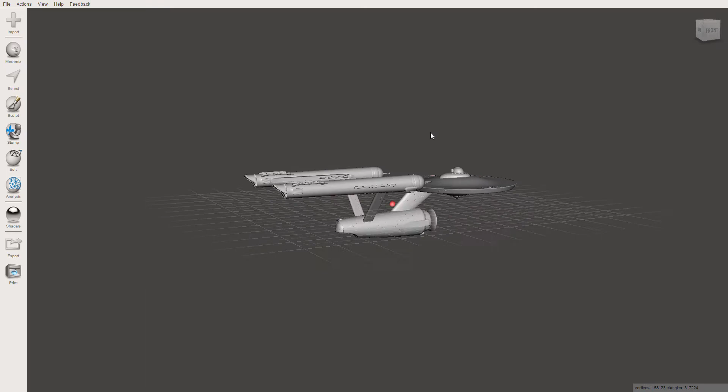If you want to pan around, you hold down the right hand mouse button like that. The left hand mouse button, as you can see here, I'm clicking away, it does nothing. You can pan like that.

Now if you want to move it up and down like that, you go back to that wheel, and rather than moving the wheel back and forth, you just click the wheel down, and you can move up, down, around like that. You're going to need to be able to do that down the line. So let's go ahead and get started with this model here.

You'll notice that it's half above and half below the plane of reference here. That's perfectly normal, most people keep it like that, but I like the whole thing being above the plane of reference. That's just me. There's a couple different ways to do that.

The first and most obvious way is to come over to, wait a minute, where am I at? Yeah, edit, transform. And then you can grab here and move it up or down, inside, front, back like that. Now that's a simple way of doing it, but there's an easier way.

When you've got it sitting here like this, you just use hotkeys and hit T for transform. You can put it up above the field like that, and then click accept. Now the next thing we want to do is scale this. Before we've changed anything on the model, we want to scale the whole thing to whatever scale we like.

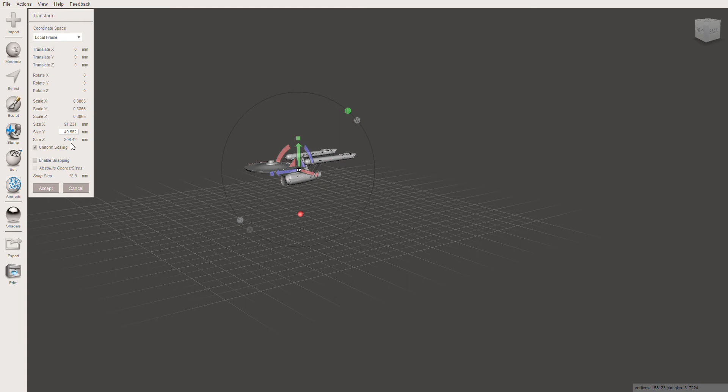206.42 millimeters. And then once I click out of that into another field, because you can see I've got my uniform scaling here, everything matches up, and now I have my smaller model. So let's go ahead and accept that right now.

And let's play with that transform tool for a few more minutes here, just so that you can see some other things that you can do with it. If I use my hotkey T to go to transform, you saw a couple other features besides the X, Y, and Z axis that you can move it on here. You see these little squares. Well, if you click on that and pull it, you see what it's doing to the whole model, which is just beautiful. And you can turn your model into some crazy freak of nature, as you can see right here. He's definitely gone through some sort of warp bubble there.

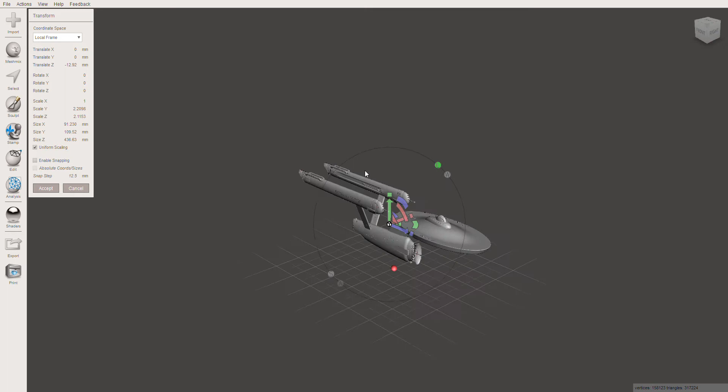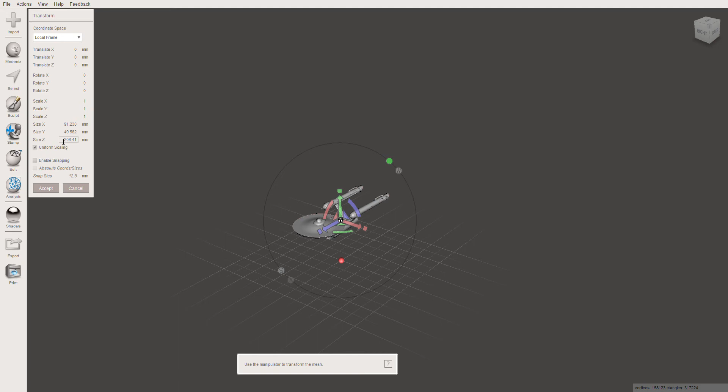And you can also rotate your model. If you grab these arcs, you can rotate your model in any direction that you want. And you're going to use those features later on, but not for this particular tutorial. Obviously, we're going to cancel all of that, and we're just going to make sure that we kept ours at 206.41 millimeters. Okay, so that's all fine.

Alright, so now you have an idea of how to move around in the space, and I'm going to show you how to cut the model up. Now, for anybody who has 1/400 scale models, we all know and love the StarCraft's original series Enterprise and how that's basically cut up. So since we don't have a pilot episode Enterprise from StarCraft's, we're just going to cut this one up as though it was a StarCraft's model. Which means I'm going to cut it up with the saucer and the interconnecting dorsal as one piece, the secondary hull on its own piece. Obviously, the deflector is going to be by itself, and then each nacelle and pylon is going to be its own individual piece.

So the very first thing we're going to do before we touch anything else is we're going to come over here to Edit, and we're going to make sure that this is one single model and not a few small pieces that are stuck together. So we're going to come to Edit, and we're going to click Separate Shells. Okay, and we'll see that there's actually two shells. There's two pieces of this model that are currently in here right now. And we're going to just make them both disappear, because a lot of times one shell will be just this tiny little thing that you can't even realize.

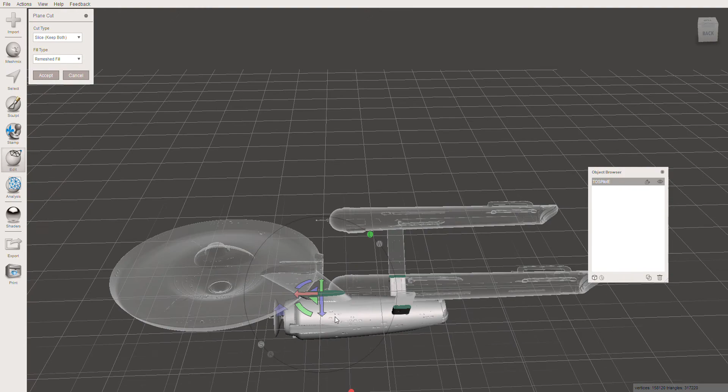But for now, since it's easier to see that from above rather than below, because I want to see exactly when it touches the secondary hull, I'm going to use this big arrow that you see right here, and just click on it once. And you see now I can see everything underneath the plane of slicing, but not above. So I'm going to continue, and again, use the center key here, move this over, and then use the right-hand key so that I can pan it around, scroll in, and I'm going to come down here like so.

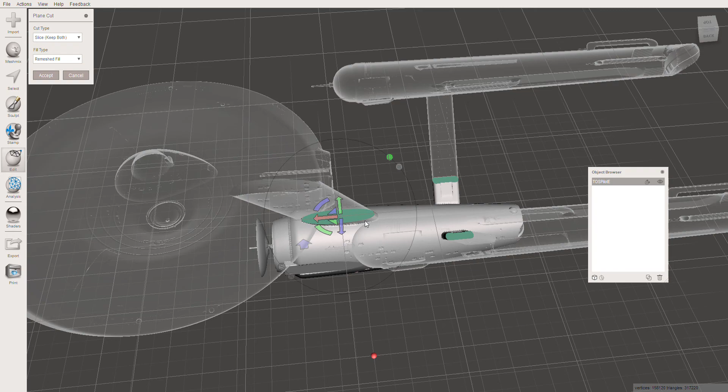Now see, I've hit the top of the secondary hull here, but there's plenty of room there to work from. So I'm going to come over here to the middle. You see how there's still more of the neck down here because of course it's angled. So I'm going to angle my plane of cut so that it matches roughly the angle of the root. And then I'm going to continue going down. You're not going to be able to get this 100% perfect, but you can get it pretty close. It's actually pretty cool how close you can get just by using the Mark 1 eyeball.

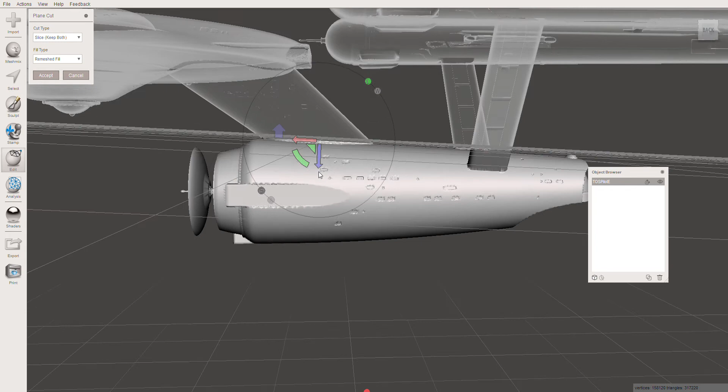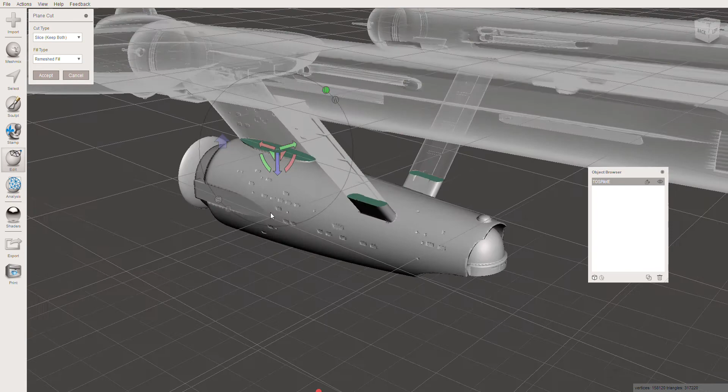And I'm going to come down a little bit more. Now see, you can see on the green, now I'm starting to catch this side, but I'm not catching that side. So that means I'm probably about as close as I'm going to get. So I'm going to grab this again, come up just a tiny bit. There. Yeah. And as I pan around, you can see that that looks pretty good. Now, since I didn't move any of the other axes, this is going to be exactly parallel. So we should be in good shape here.

And you'll also notice that I've also cut most of the pylons off here and here, but there's still a pretty big, hefty chunk of pylon on those sides. We're going to fix that. Don't you worry about it right now. Right now, we're just focusing on cutting the saucer and the neck away from the secondary hull.

You come back over to plane cut here. You make sure that you keep it at slice. You hit accept. And then from here, you need to select separate shells. Until you do that, you haven't actually officially cut the model apart. Now that I've hit separate shells, you see I've created a whole bunch of new shells. You can see them along here. And what it's done is it's separated the saucer and neck from the secondary, and it's also separated each one of these pylons.

So since we've done that, let's go ahead and take a second to name them first real quick. Instead of shell 1, shell 2, shell 3, we're just going to go ahead and double click and rename that saucer. This one we're going to rename secondary. We'll select that one and we'll rename it port nacelle. And last but not least, we'll take the right hand one and rename that starboard nacelle.

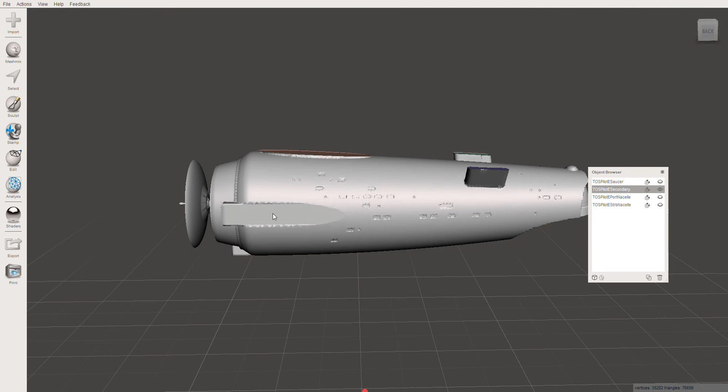You'll see that if I've got the item selected like this, but I've closed the eyeball, then that piece that just got turned off shows up as transparent red. But the minute I select another part of the model, boom, it disappears. Okay, so we've got that removed. Let's go ahead and turn off these for the moment as well. And let's work on finishing up this lovely secondary hull here.

Let's separate this deflector dish from the rest of this part here. And you know, the deflector goes pretty far down inside here, so we're going to have to cut that deep inside and then recombine all of these pieces here. And the other thing we're going to have to do is we have to remove these little stumps of the pylons here and here. So let's actually do that first. So we have our secondary hull selected. We're going to come back over here to edit. We're going to go to plane cut.

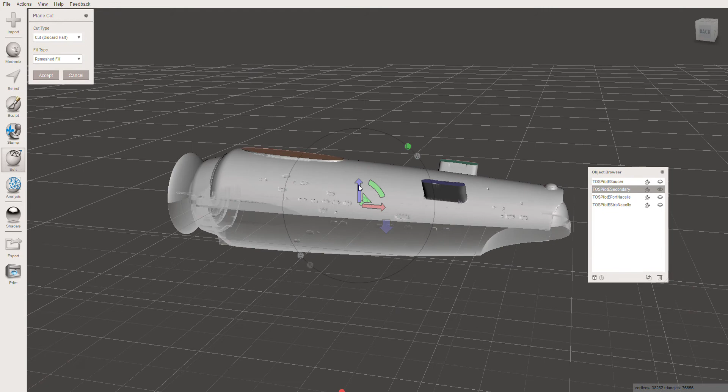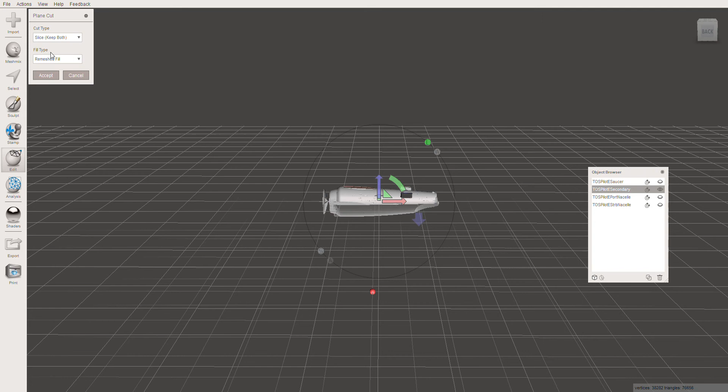And the plane cut tool is always going to put the center of the tool in the middle of whatever item you've selected. So you can see here that it's dead center of the secondary hull, which is kind of cool. That helps a lot if you're doing other items that you want to slice right in half. It automatically does that for you, which is very, very cool. But we're not going to do that at this point. First thing we're going to do before we start touching this is we make sure that we have this set. Instead of discard half, we want to keep it on slice, keep both, and remeshed fill.

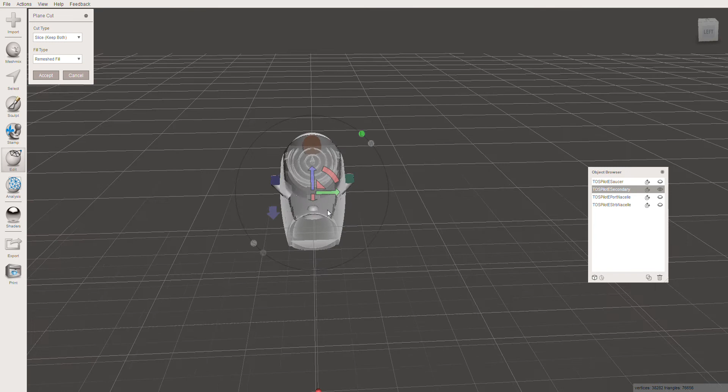And now we're going to go ahead and move the tool a little closer to the center of the parts that we want to remove. So we're going to pop it up here. And again, I want to be able to see from the top down, so I'm going to click this arrow. There we go, like that. Okay. Actually, I think it maybe looks better that way for now. Let's start with the starboard side one. We'll come over here, and you see how I'm kind of putting it in the center of the pylon itself. There we go. Now, obviously, we need to angle this appropriately compared to the model.

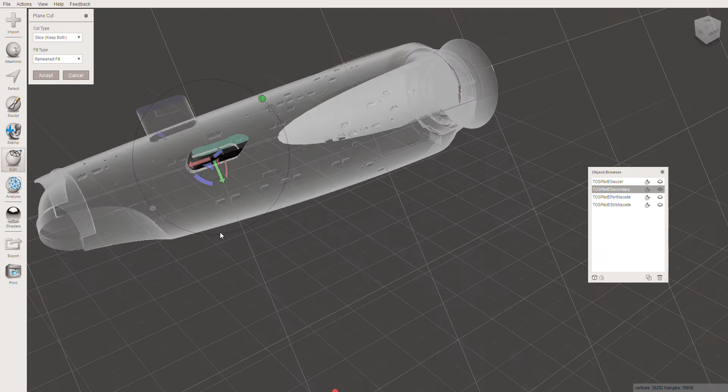We're getting close. You can see that we're getting pretty close here. And let's come down. Now you see this big green swath as well, besides the part that we're cutting. When we do this plane cut, it is going to remove this big chunk right here, but since we're keeping both, we'll be able to recombine that without any issues.

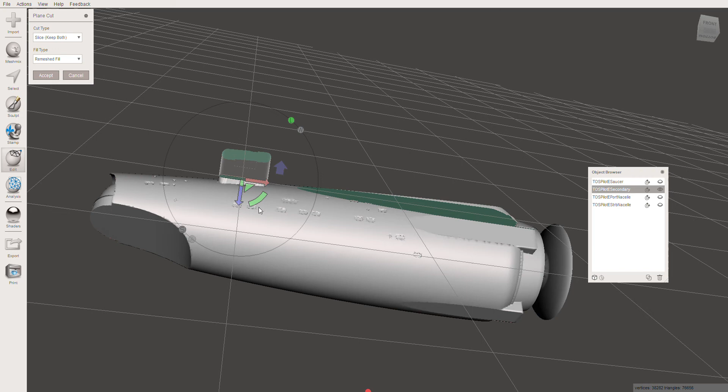Now again, because of the angles of the ship, you see how the slice is much closer to the secondary hull here at the front than it is the back. So we can fix that just by angling it along like that. And you see that it also removed all that big green swath right there. And we can continue scooching it down.

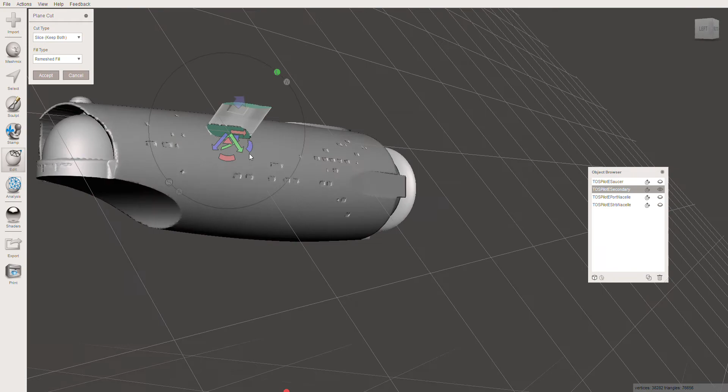We're going to try and get it as close to the hull as possible, just like we had done with the primary hull. That's pretty close. That's really close. Okay. I think we're good there. I'm just going to spin it around a little bit to make sure that it looks all right. Okay. Yeah, that definitely looks good.

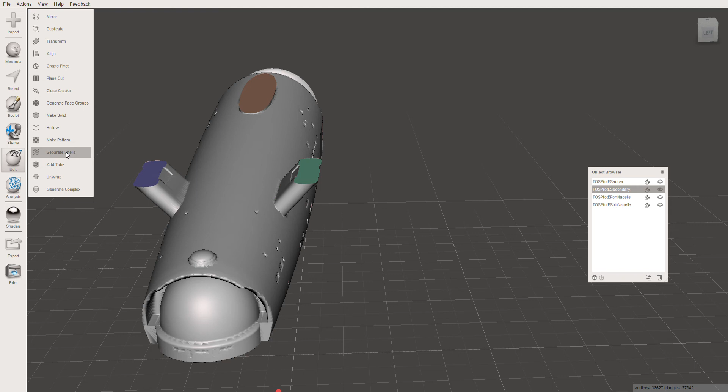So we make sure that we've sliced, get both. We hit accept. And once again, we hit separate shells. Now that's going to create that as a separate piece. And see how it's labeled secondary shell 1.

Well, let's go ahead while we're doing that, and let's open up the starboard nacelle, and we're going to combine these two. Select the main piece that you want, and then select the smaller piece by holding down the shift key. Let me show you that again. You select the main piece that you want, hold down your shift key, select the other piece that you want to combine, and you have a few different options to do.

In this case, it's always easier. You can do Boolean union. There's nothing wrong with that. There's a lot of good things about Boolean union, but in this particular case, when you're recombining these items, it's just easier for the processor, easier in terms of speed to hit combine.

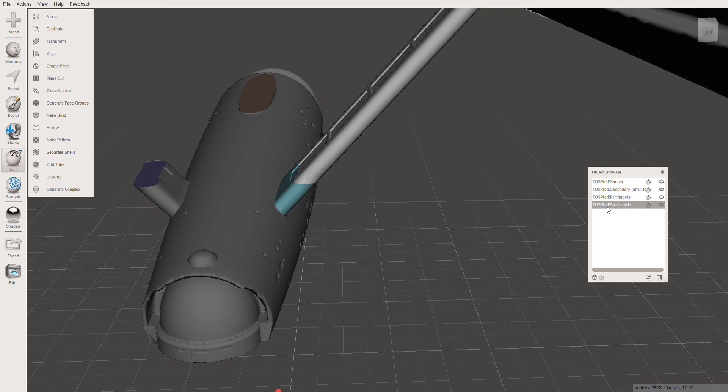And you'll see down here that because you selected the larger part with that name, it combined it in with that name. So now the starboard nacelle is all one full piece, and you can see the color difference from where we combined these two. You'll see that in the future parts as well. We can close that out. Now we're going to select the secondary hull again, and let's go ahead and do another plane cut.

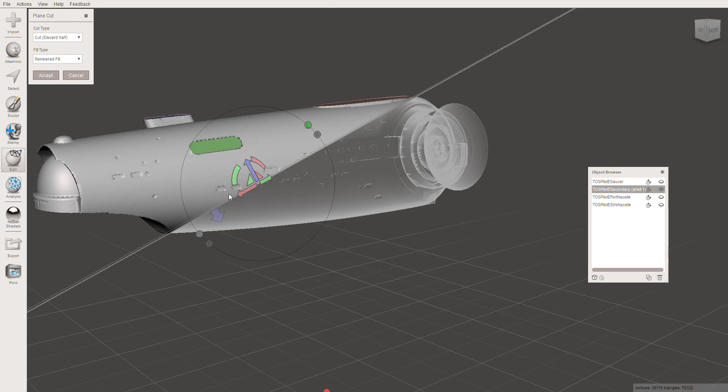Oop, there's a good accident that can happen. Sometimes you think that you're grabbing your tool, but you actually aren't, and you're just making a line like this. Now, what you're doing when you do that is you're creating an angle that the plane will cut along. You see how that worked? But that's not what you really wanted to do. So Control Z will fix that error, you don't even have to hit cancel, anything like that. Control Z will send you back to where you were. So we're going to try that again.

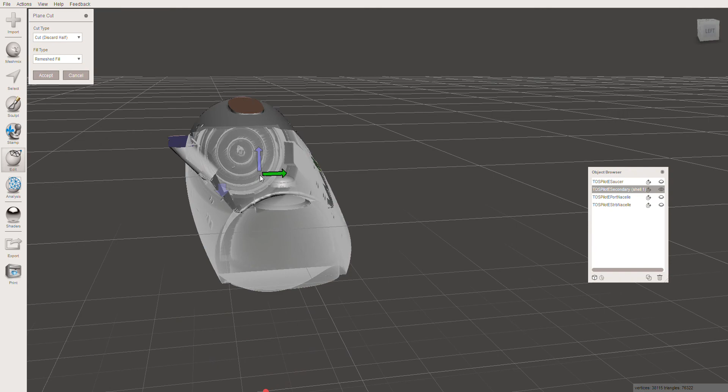We're going to take this, bring it over here, come around to this side, bring it up, bring it over, and we're gonna, are we in the middle? We're mostly in the middle. Okay. I've just found that it's easier to work from bringing the tool to the middle of the part that you want to work on. Okay.

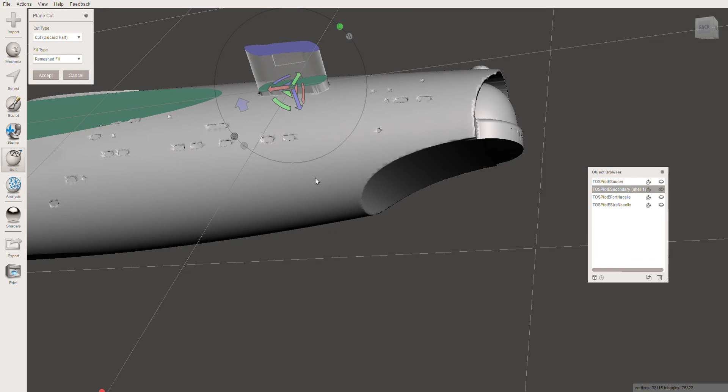And just like with the starboard side nacelle, you can see that even though we haven't moved any of these angles, because of the shape of the hull, the cut is much closer to the front of the pylon than the back. So again, we're going to take this and just rotate it like so. Now there's a couple different ways that you can rotate this, and I'll show you both right here.

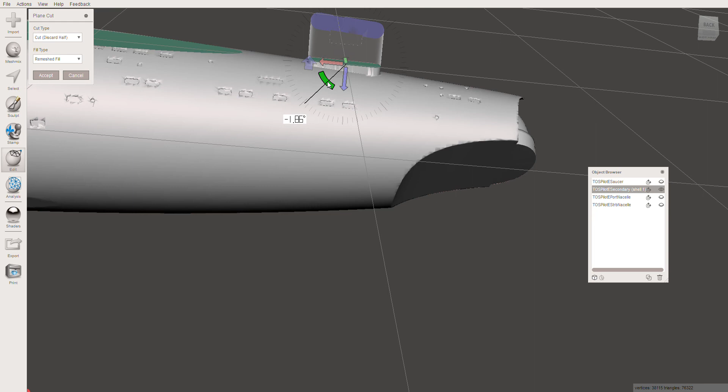If you want to do non-incremental bits, you see how it's giving you like 11.58, 9.45, 2.47, non-incremental bits. So you're just eyeballing. You can keep it inside of that dial face that you see. This dial face. Now if you come over to the dial face, 5, 10, 15, 20. You see how it snaps to those perfectly.

As long as you're touching the dial face, it will snap to those degrees perfectly. But if you're outside of the dial face, it will do non-incremental bits that will allow you to just eyeball it. And for models like this, honestly, most of the time I'm just eyeballing them.

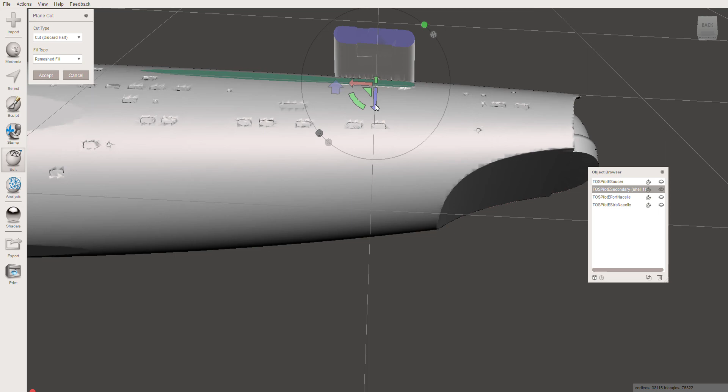Okay, let's get down closer, closer, not that close. And you can see why I said not that close. I'm in the green, and then all of a sudden, boom, now I'm slicing a piece off all along here, which I don't want to do. So we'll come back up. And I feel like that's not really as accurate as the starboard side.

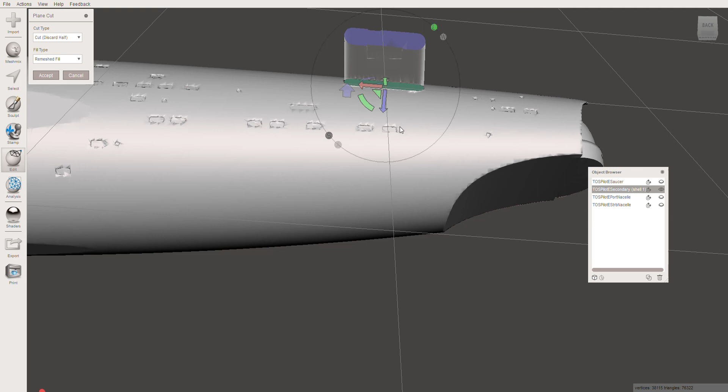So let's try rotating this just a little bit more, like so. And just a tiny, tiny bit like that. Okay, let's see if that does any good. Okay, that did a good job. We're much closer to the secondary hull now. So now that I'm in that spot, I'm going to make sure this is switched from cut to slice, accept, and separate shells. And now these two are separate.

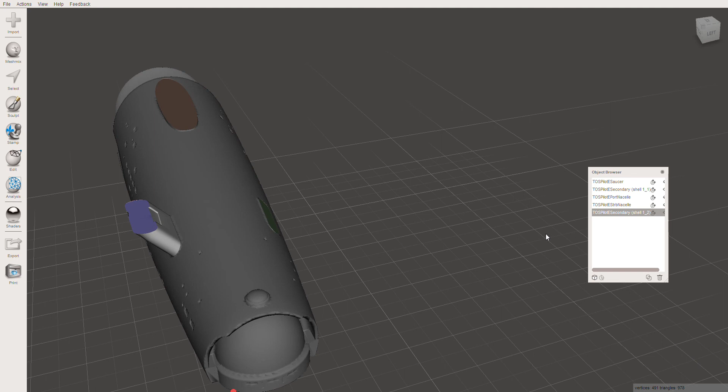And just like I did on the starboard nacelle, I'm going to go ahead and open up the port nacelle. And I'm going to combine this by left-clicking on it. And then hold down my Shift key, left-click on this piece, and hit combine. Just like that. Secondary hull is still secondary, and when you're slicing, it likes to put in the shell names as well, which I occasionally just come back and clean up. That way my object browser looks nicer.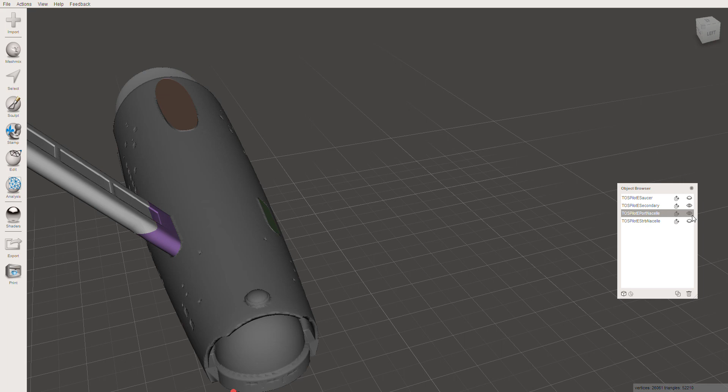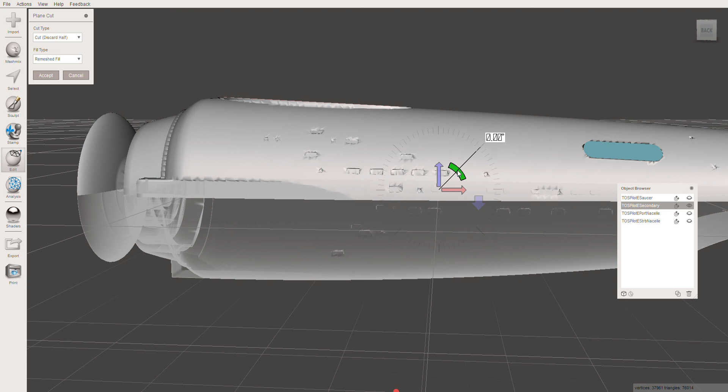Okay, so now we've got these separated away. We're still going to work on that secondary hull. Now we're going to work on getting that lovely deflector dish away. So we'll come back over to Edit, Plane Cut. Here's where those 5-degree increments really come in handy. I'm going to grab my arc here, and I'm going to come boom, boom, boom, 90 degrees, just like that. And we're still set in the center, which is what I was telling you about earlier, is nice to do.

I'm going to come up here, and I'm going to keep this up until I can see those rings separate. There we go. Okay, our rings are starting to separate here. That's where we really want, right there. You see how all the rings have separated. Oop, too far. I want to do it right at where they begin. Right there. There we go.

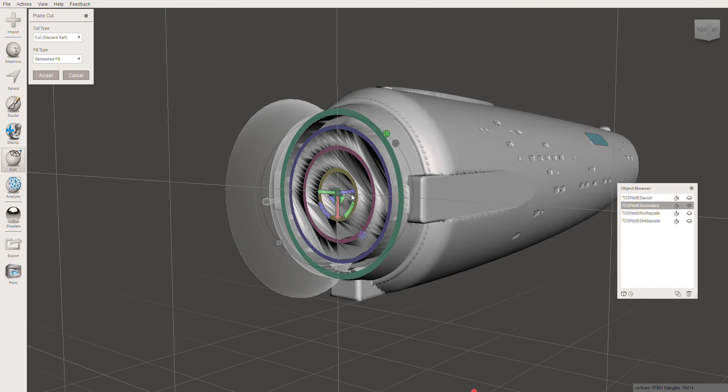Okay. Now if I come over to this side and click this blue arrow here to flip the view, that's nice. Okay. So this shows you all the different rings that it's going to cut away, including the center piece, which is going to be our stub for our deflector dish right there. So we'll make sure that this is slice, keep both, accept, separate shells. Now it's going to create a whole bunch of things here. You see along here it created a whole bunch of extra shells. 5 new objects created by the separate shells tool. Cool.

Okay. So let's select the deflector first of all. And let's go ahead and name it as such. Okay. Now we're going to go ahead and close the eyeball on that. And we want to recombine all of these pieces here. So we're going to select the main one, the secondary hull, and now we're going to hold down our Shift key and start left-clicking, selecting all of our rings again, and hit combine. Okay, now we're back. As you can see right here, the secondary hull has all of its rings. I'll take that silly shell off of there.

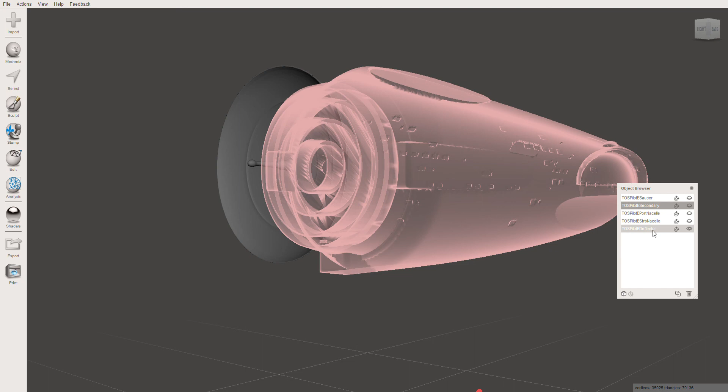And if I close the eyeball on that and open the eyeball on the deflector, you can see how the deflector is one whole solid piece, including the stub to the back, and we're going to start pinning this model now. We've created all of these parts, and the next video I think we're going to go ahead and pin. But before we close this video out, we're going to come back up here to File and hit Save.

And there you go. There is the Pilot Era Enterprise, original series Enterprise, Pike's ship before they did that redesign, which I actually do love the redesign for Pike's ship. I just wish that they had straight pylons. That's really my only gripe about it. But beggars can't be choosers, and I was not consulted on that, so I don't think I can complain too much.